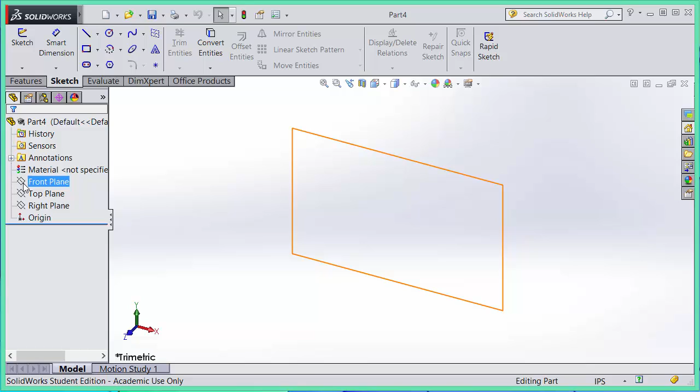You can show these features by just clicking on it, and on the pop-up menu icons there's a show button, which is a glasses icon. So you can click it, and that front plane is now visible. You can do the same thing on the top plane and right plane.

So we have 3 planes, and there is an origin in the middle. The coordinate system starts with the origin, and there is the front plane, which is the XY plane, the right plane, which is the YZ plane, and so on.

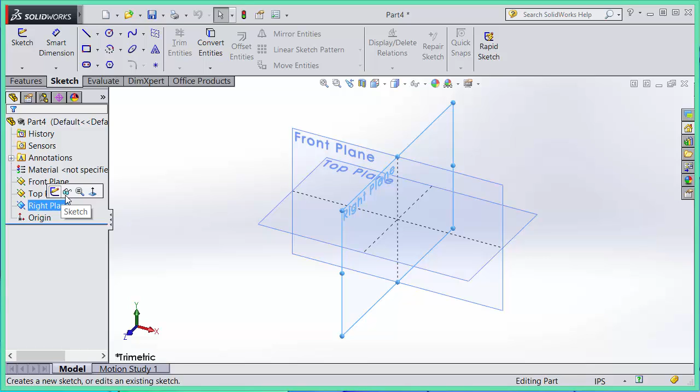I'm going to hide the planes again. You can click on each plane and hide it. So show and hide are toggle commands - you can click on and off by clicking on that show hide button.

Now I need to create a new sketch, and when you draw a sketch you need a plane. You cannot draw any 2D sketch in space without specifying a plane where you want to draw on. Most of the cases you will use one of these 3 planes: front plane, top plane, right plane. You start using one of the planes. In this exercise let's just use the front plane.

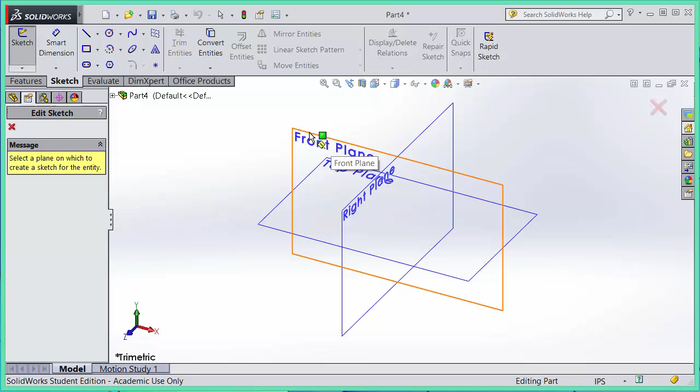So you can start with a sketch. Make sure your sketch tab is selected in the command manager, and on the left hand side there's a big button which is sketch. If you click on sketch, all the reference planes become visible and you can choose one of them. Move your cursor over the boundary of the sketch plane and click on it. Now the view is reoriented so that you're looking normal to the sketching plane, which is the front plane, and you are ready to draw a sketch.

As you can see here on the left hand side, Sketch 1 is already created for you. That's a sketch feature, and its name is Sketch 1 - that's the default name the system provided. You can rename it later.

Right now, as you can see, the bar is above the Sketch 1 feature. That means you are currently editing that feature, which is the sketch. If you look at the lower right corner, there's an 'Editing Sketch 1' indicator, and on the right hand corner there are two buttons: one is OK, the other is Cancel.

So if you're done with the sketch, you can always click on the OK button or the Cancel button to exit from the sketch editing mode.

Another way of exiting the sketch mode is to click on this sketch button. You just pressed it, and that also works as a toggle button, so pressing it again exits from the sketch.

I'll cancel it for now and show you another way of creating the sketch. So, discard changes and exit.

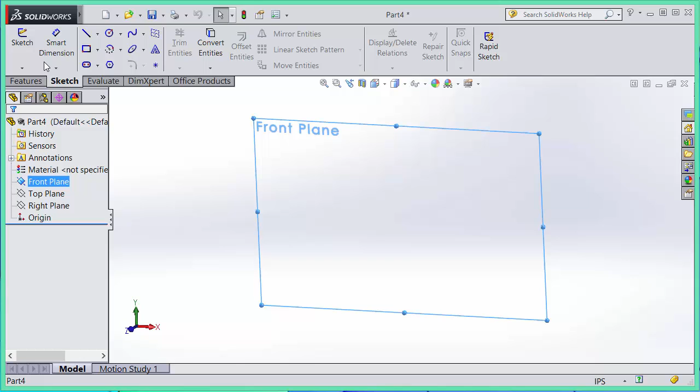Another way is you can pre-select the plane. In SOLIDWORKS, there's always support for pre-selection and post-selection. Earlier we started from the sketch command and then selected one of the planes - that's a post-selection. You can also start by selecting the plane you want to draw on first, and then while that is selected, press the sketch command, and that pre-selected plane will be used for sketching. This is what is called pre-selection. Most of the time SOLIDWORKS supports both pre-selection and post-selection.

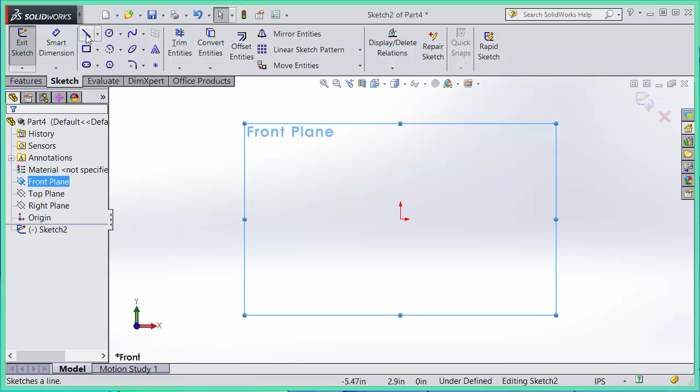Okay, so now we are in sketch editing mode. Let's create a simple one, like drawing a line. Here are all the sketch commands in the sketch tab, and the simple one you can draw is a line. So you can click on that command, move your cursor, and let's start from the origin. Just click once, then click another position - the line command keeps repeating, so you can keep clicking, but I'll stop it here. I'll click the line command again, and the line command terminates.

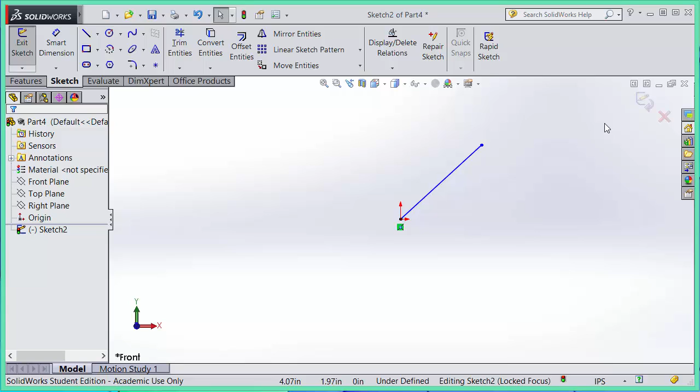Now I'm done with the sketch, so I want to exit from the sketch. You can click on this exit button on the top right corner. Make sure you don't press this X button, which cancels it - if you cancel, you lose whatever you did. Press the OK button, and now we are exited from the sketch.

And the sketch - you can still see the sketch that you drew. We have the Sketch 2 feature created. It's Sketch 2 now because I created Sketch 1 earlier but then canceled it, so the system automatically adds another number, which is now Sketch 2. So as you can see, that feature is created, and you can still see the sketch.

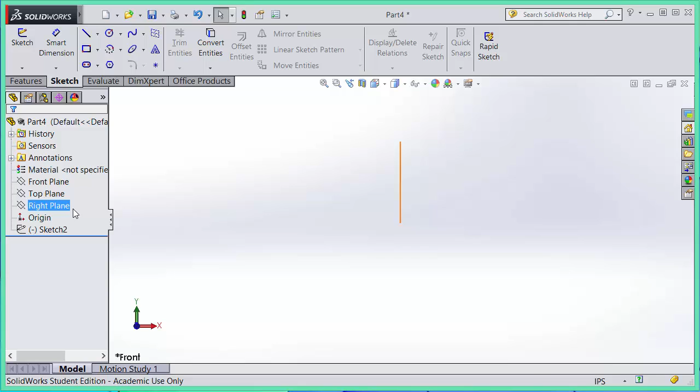If you want to hide that, you can click on the sketch feature and select Hide, and that sketch feature will be hidden and the icon will be grayed out. Select it again and choose Show, and you can see the sketch.

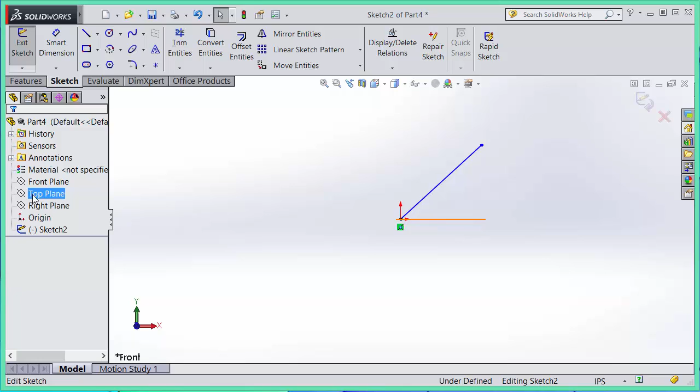If you want to edit the sketch - to make changes, add a new one, or delete any sketch entities - you can edit it by clicking on the sketch feature again, and the first icon is Edit Sketch. Click on that and you're back in the sketch, where you can make any modifications, like adding another line or any changes, and then exit again - now you have an edited sketch.

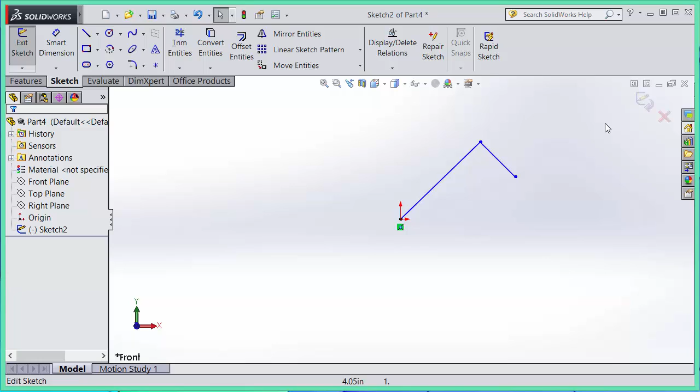So you can always go back and forth when editing it. Make sure you're in editing sketch mode - you'll see that button in the top right corner, and that's where you're editing it. Exit, and now you have the sketch edited.